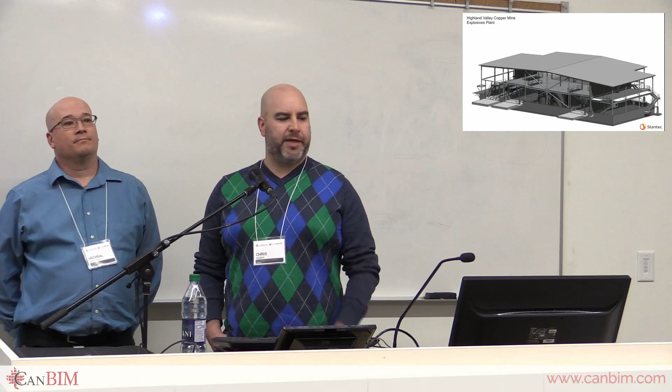So this is Highland Valley Copper. We did this - it's probably my first significant project done all in Revit. It's also the first project that we utilized schedules for quantity takeoff. People didn't believe me that we'd be accurate, and we were probably within a fraction of a percentage for concrete volumes and steel takeoff. So it was a win for me.

And this is a new building being built right here on Thompson Rivers University, the Industrial Training and Technology Center. Again, Revit wasn't a requirement, but the architectural team decided to set it up in Revit. It's under construction now, and I can tell you that most of the plumbing systems put in underground, as well as mechanical systems being installed now, are being installed exactly where we designed it because the contractors can't find a better way to do it. We fully detailed the incoming water room with all of the valves and hot water tanks required, so it's very detailed.

What's the next one? This is another building being built on Thompson Rivers, the Nursing and Population Health building. I think it's going really close, okay, over there somewhere.

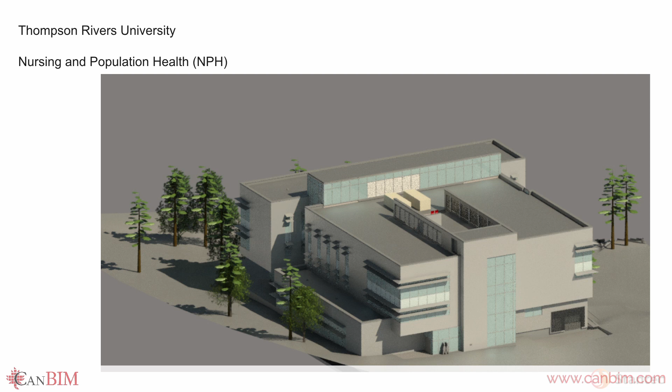Again, another project that Stantec made the decision to use Revit. This is also a project where we are using BIM 360 to collaborate with another consultant who isn't in our office, so we're using the cloud and hosting for Revit models and other options, and we'll show some more on that soon.

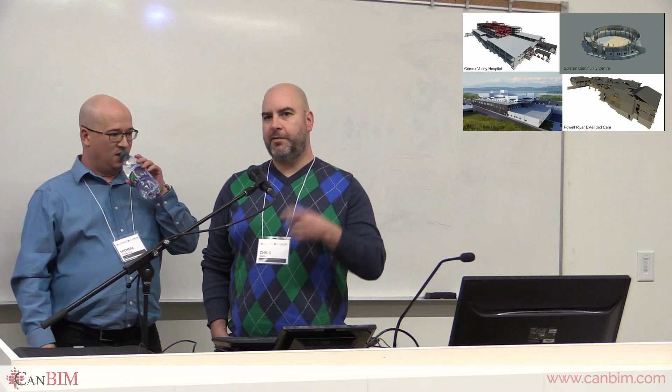These are just some examples of other large projects. You guys know Enderby, anybody? Splatsin was a fancy one out there, well, for Enderby.

Mike and I both worked on Comox and Campbell River Hospital, which was 2 hospitals in parallel, which was a little bit of a nightmare, but we got it done, and it's handed over last fall. And Powell River was a substantial - I can't remember the square footage - but it's a fairly large extended care facility, all out of wood, except for obviously the foundations.

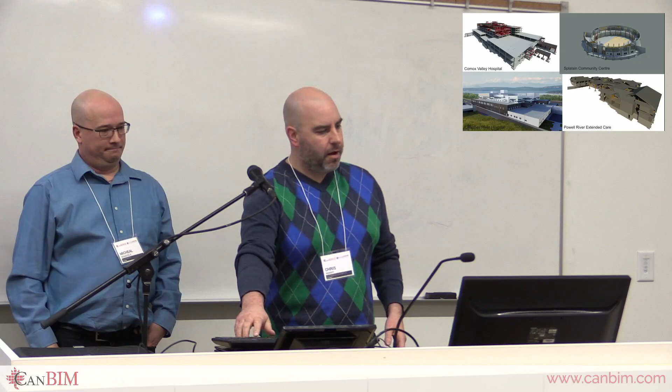This is you - yeah, this is me again. This is an example of the many different softwares and add-ons that we use with Revit in order to complete a lot of these buildings.

BIM 360 and C4R is what we use for a lot of collaboration outside of Stantec. It's also a great markup tool, an opportunity to review the building without having Revit review it in 3D. dRofus, they had a great markup on there.

dRofus is a database for maintaining room information. We use it specifically for large hospitals to ensure that each room within the hospital meets its design criteria and has all of the pieces that it needs.

It's huge. You click on a building, click on a room in dRofus, and it checks the model and tells you what's missing from that room, so you can tell your architect to go add that, or your mechanical tech, right down to the light switches and thermometers.

Revit is a tool that we use for collaboration, coordination, issue tracking, visualization, rendering, and it's multidiscipline authoring tools. And then there's Dynamo, which is a visual programming language that works within Revit. I'll mostly use it for data manipulation, but it also will do visual manipulation and modeling.

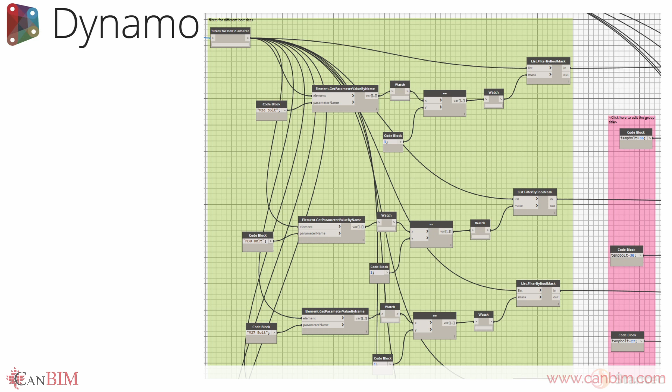Which was from a presentation that I did a couple of years ago at another Build conference. But this is just a section for designing base plates for structural steel columns, gravity mostly, and we ended up adding axial loads or lateral loads and axial loads.

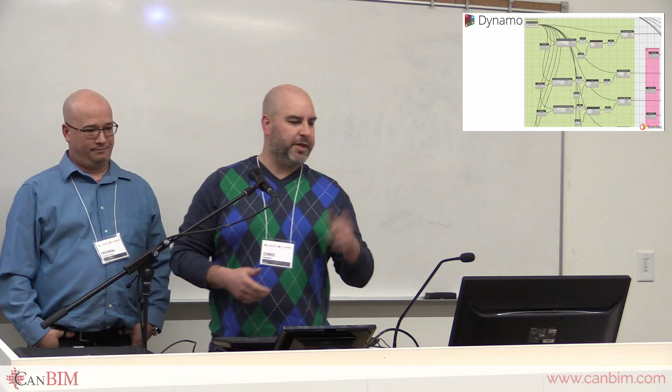So this is one of 5 scripts I think to get it done. But if you think about it, for bulk quantities for fabrication or pricing, it's close enough. It's not right down to the nuts and bolts exactly, but it's within about 15%. So if you're trying to get a quick number, it works. We plan on refining it, but that's in the works. So get into Dynamo, it's really worth your time, very powerful.

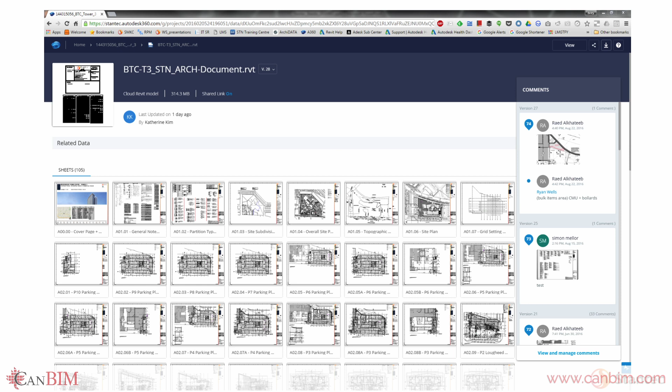This is an image of BIM 360 showing the architectural model from, I believe that's Brentwood Tower. The architect or owner or whoever you give access to can go into this, look at every single sheet, markup and make changes, ask for changes to be made, mark it up and say we need something here. What is this? How do we fix that?

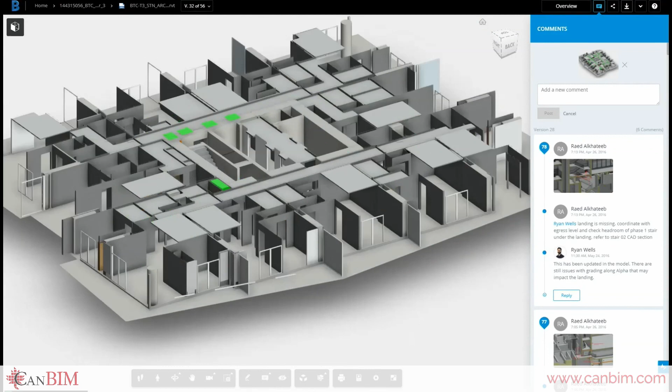Without having to use any special software, this is right in their web browser. And then the next one will show, if it plays, a video of looking into the model right on their web browser, inquiring on information, cutting sections, again, with just the ability to point and click and move stuff around.

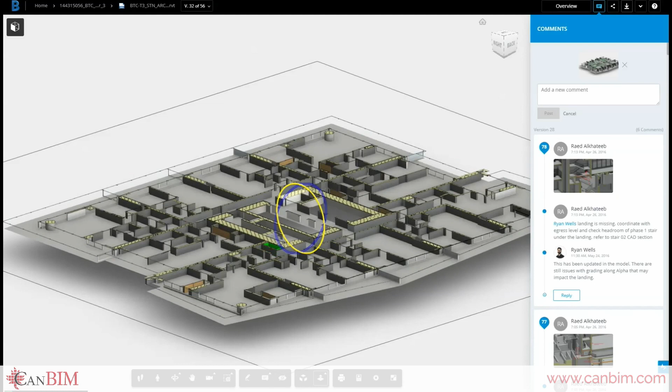And then on the side, there's a chat window, and it'll memorize everything, it'll show everything that you said, and you can add pictures and notes and comments and say what is this, how do I fix this, and assign it to somebody, and they'll get an email saying you've got something new to look at. Just a great communication tool.

This is through A360, right? Yeah. So A360, we have a short throw projection monitor in the Vancouver office. This is actually, is that Tower E? So this might be our head office, actually.

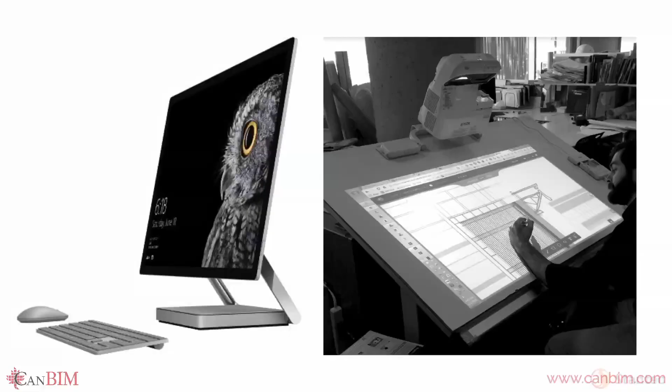So basically, you can just mark up virtually in the plan or in the environment, and it sketches it right onto the plan, so you can send it back to the team collaborators. You're using pencils and pens, a stylus, a ruler and a French curve and whatever you're used to, making those markups in a hand drafting situation, and then having it digitally recorded and sent to your CAD guy or architect.

It keeps track of all your comment log and has a tool to maintain that information. When someone creates a comment, they assign it to a person, and then you respond to it and fix the problem, and that lives in this model forever. You import Revit into it, and when you fix something, the picture you took of what was wrong, or the comment that made it, takes a picture often, and you can click on that comment and it'll jump to the live model and show you how it's been fixed. Very powerful software - it's like Navisworks on steroids.

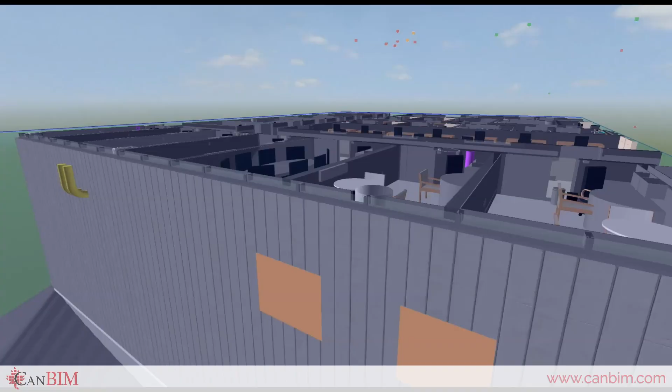It works with Navisworks for clashing too. Here's a video review of the Royal Columbian Hospital project, specifically the energy center within the project. Just being able to look at all of this within Revit is pretty difficult, but being able to walk around and move things around, adjust it, and then make comments is powerful.

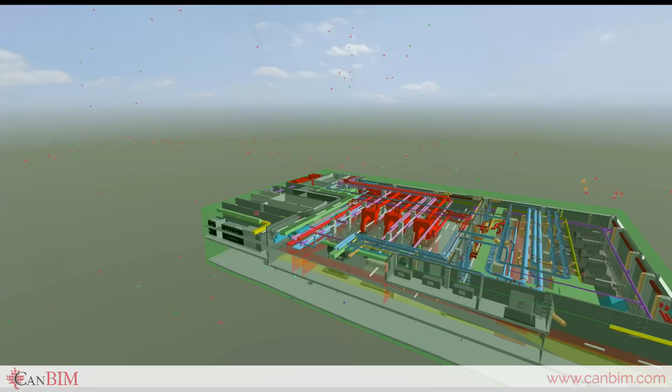You can see all those little red and green bubbles floating around - that's where someone has made a comment. If it's red, it hasn't been fixed. If it's green, it has. You can click on any one of those right from this view and it'll take you to that comment, and you can fix it, assign it to somebody, or review what's wrong with it.

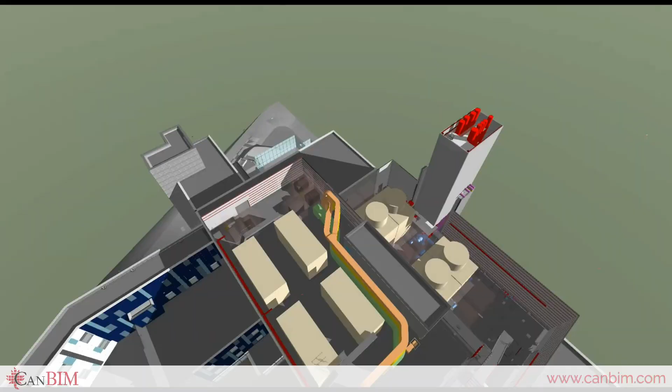You can author a comment out of Revit, out of Navisworks, or out of AutoCAD - it holds data. Yeah, it's like a giant database. It holds all the comment data.

I'm talking about parameter data. Yes, it's just like Navis - you can pull all the information you want. As long as someone put it in, and it existed in your Revit model, it will exist here, or in other software too - most of it.

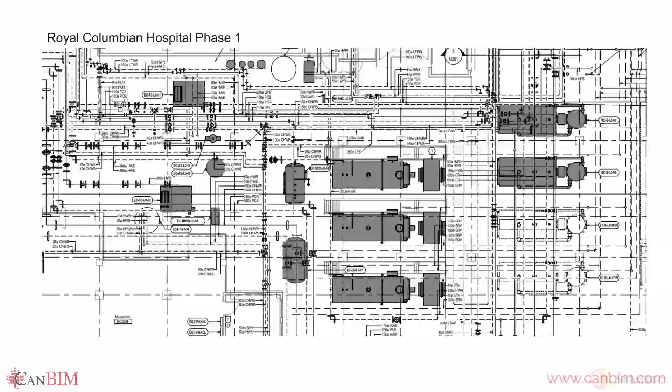That is an example of a cut of the mechanical room in RCH that we just looked at in 3D. That's what the contractor has to build from. It's a good thing they get the model.

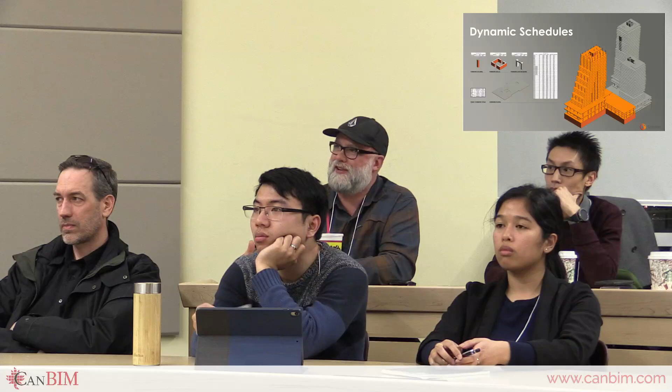Question for you guys - I feel this on the civil side, but is it Navisworks or Revit that can allow your model timeline to coincide with your construction timeline charts? Yeah, we're getting there, we'll show you a video. It's Navisworks, and then a bunch of other things.

Dynamic schedules are great - if you learn how to manipulate them with Dynamo, you've got your career ahead of you. Dynamic schedules are anything from quantities to inputs. You could design your building out of scheduled data and then just tell Revit to go.

So schedules - if you remember that BIM is just databasing, right, and you're just manipulating it - schedules are what we need to see things.

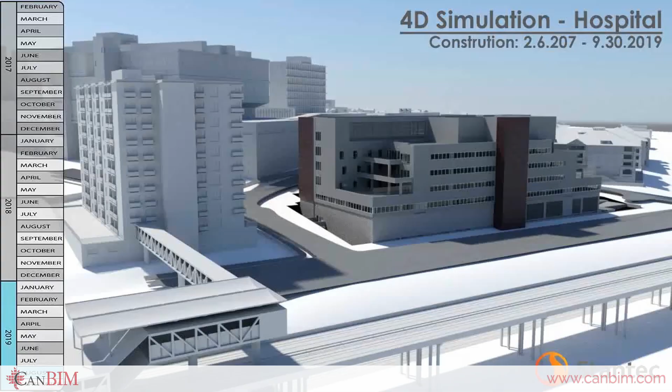This was exported from Revit to Navisworks, and then into 3ds Max. This is Royal Columbian Hospital Phase 1, and this was used in public consultation and owners' meetings and whatnot.

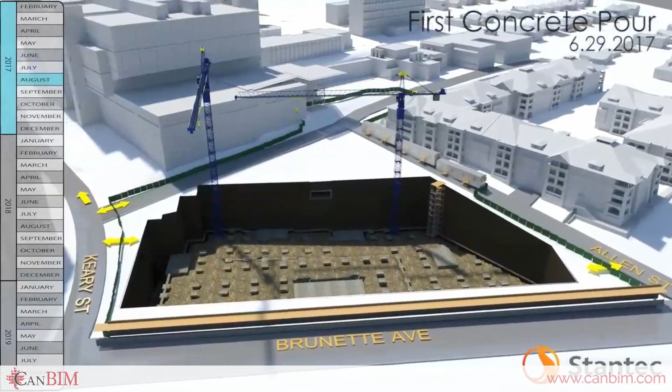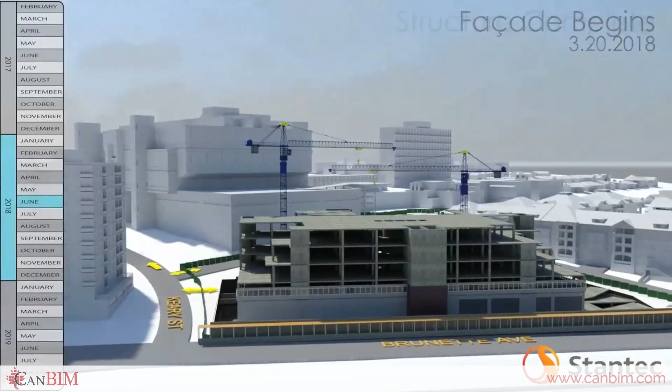Specifically because you can't block Brunette, you can't block Keary Street, you can't block anybody, because it's a major thoroughfare in Vancouver, or New West. You can make this as complicated as you want, right down to single columns, rebar - we do have some examples, we just don't want to bring them here, it was getting way too long.

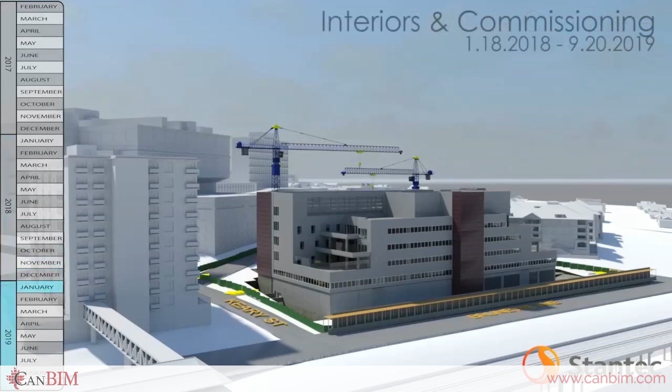Does Navisworks optimize the placement of the cranes, or is that down to something else? The cranes were brought in at 3ds Max, and then we just set them on their own.

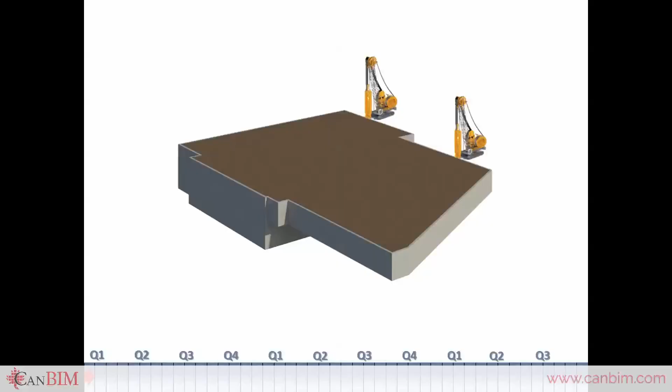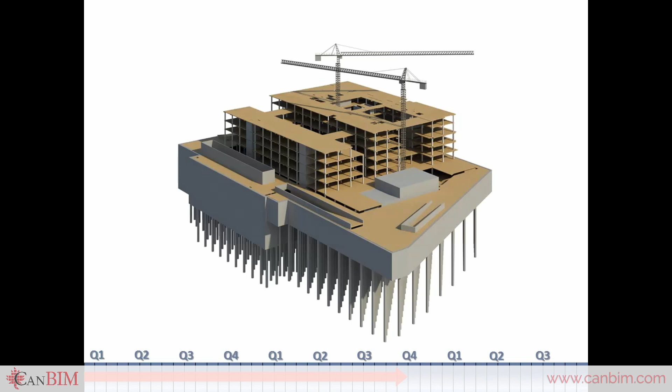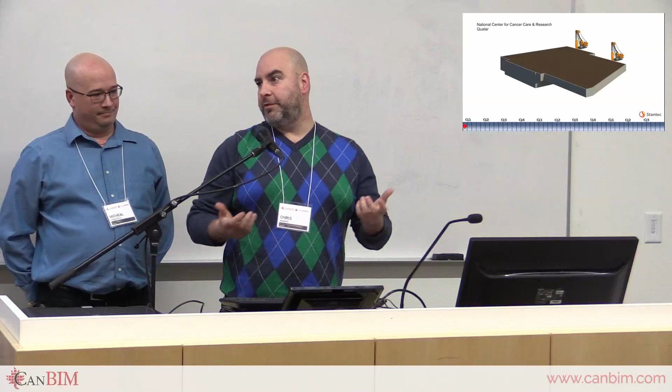This was my first foray into 4D schedules. This was NCCR, the biggest hospital I've ever touched, in Doha. It's not gone forward, obviously, because it's a lot of money, but it would have been the most advanced cancer research center in the world had it gone ahead. Originally we did this just by stringing 3D views together - we were learning, I was learning, I didn't know how to do it. So this was our tester.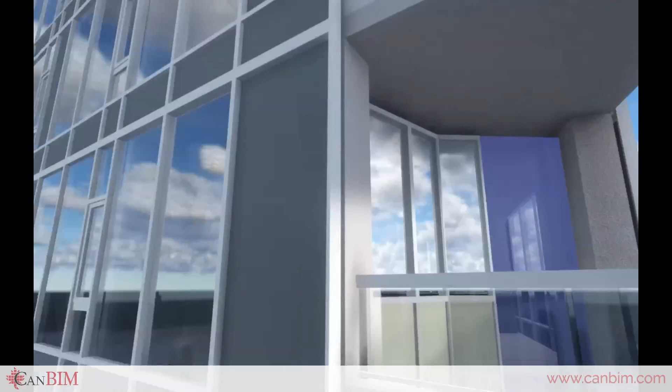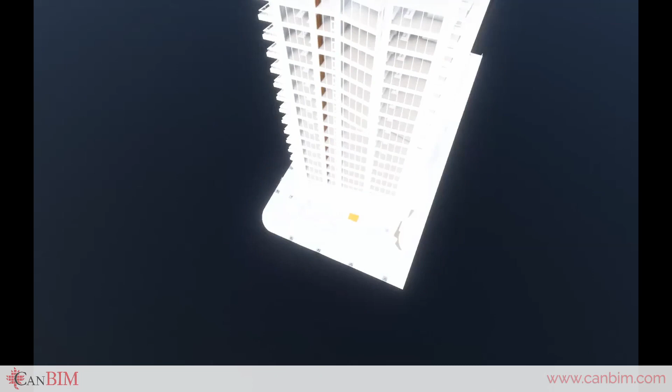This is a rendered building out of Enscape, used for a presentation with clients to show the changing views of what the building would look like, inside and out. I don't remember, they said something about how quick it was done - Hayden, is this Brentwood? Yeah, it's probably done with Enscape's pretty quick rendering engine, it's a game engine I think. That's an architect's thing, we just got told to throw it in for fluff.

We can skip this one.

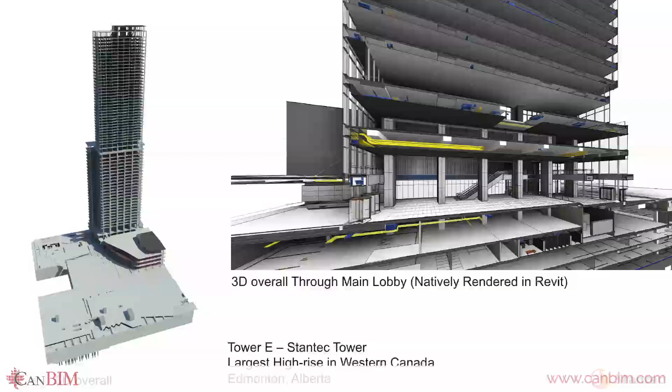This is Edmonton, the Stantec Tower. The one on the left is the full view, showing the podium. It's 67 stories, a monster, with a nice transfer slab on the 30th floor, about 3 meters deep.

I did that model a lot. Did you? Yeah, I built that model, for proposals and stuff like that. I recognize that model, that's my baby. On the right, that's natively rendered in Revit, which is, I mean, not fine, but it gets the point across, right?

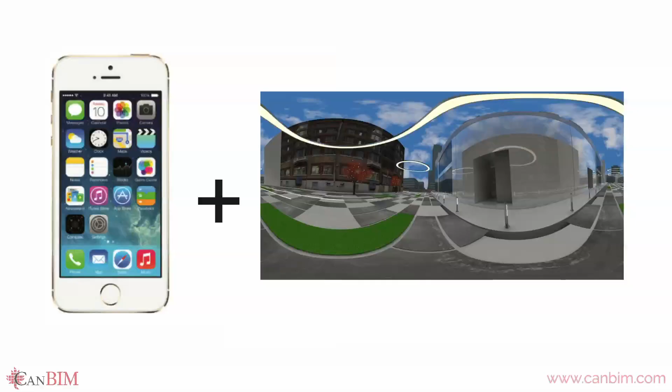Yeah, this touches on what Hayden's got in the next room. So if you want, you can leave it up for a minute, and you guys can pull out your cameras and check it out yourself. This is a web-based VR platform that allows us to render our product and then email it to the client.

They can pull out their phone, and if we email it or text it or scan it, you get something on your phone that you can look at with Google Glasses, and it's a spherical rendering at a point. It allows you to look around that single room, so we could put a camera point in this room and render it as a spherical rendering, stand in that point, and look around.

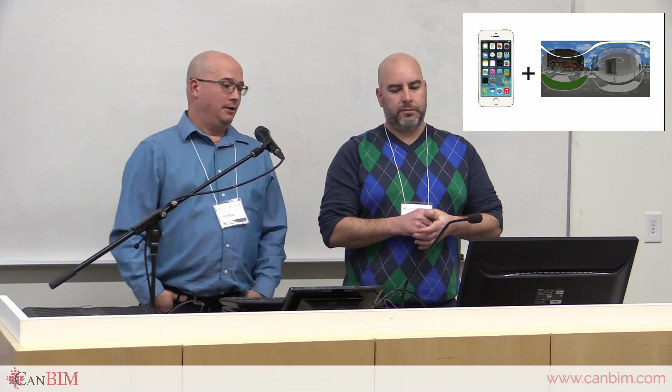Yeah, so those are stereoscopic - just Google Cardboard works well with that. They're so easy to do, and light. Why are people not doing it more? It's such a great tool to get a point across to a client, lightweight and easy to send around, look at it, make a change, and send it again. Those are 2 QR codes we used for small renderings - I don't remember what buildings they were, but it's a spherical rendering.

Does anybody have any questions? Were we way too fast? Yeah, we were probably - we missed a whole bunch of stuff because I couldn't see the screen.

Quick question about the spherical renderings - and actually Dan, you could probably answer this because you're in construction - are you using it for record tracking of the building construction process? During construction there's been a lot of record keeping with photography, then we went into point cloud scanning, and I know with photogrammetry, especially with that spherical tech, you can put it in there and take a quick 360 shot.

Yeah, this is out of Revit, the spherical renderings. Oh really? So it's not using hardware on site? No, this is just a rendering of a room, or outside of a room, within Revit or within Enscape or other visualization tools. It's just a rendering of that room.

But we are using a 3D camera that we can take pictures with, it's got GPS in it, and you can take a picture - we've got full pictures of a room that we're going to renovate, and we can look at that all in 3D and import it into our Revit models. There's no reason you couldn't take a site photo and then pin it to any of your softwares for future reference down the line.